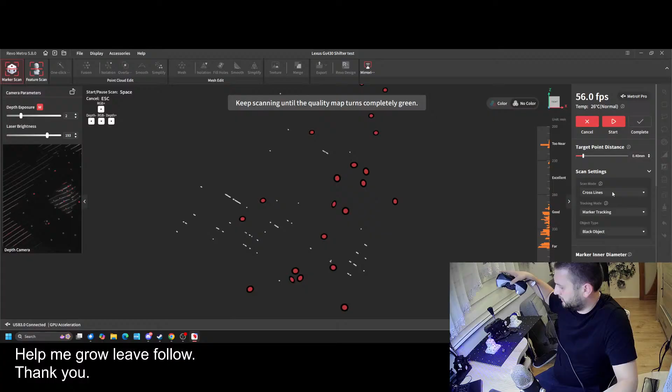So cross lines, don't know if you can see it, let me turn off the light. There's loads of crosses on my hand now. So there's different modes. This cross line like this. If you change to that, then you just have normal lines, as you can see. You got the single line. Apparently this is meant to be quite good for, wow, UV. I'm wondering if I can get tanned. So it's single line.

General turntable. Turntable, I'll leave it for another video or another live. Full field. I don't really know what this is about. Come on, hurry up. My roller says you're rolling too long. Disco mode, disco mode. Oh, wow. Not sure what this is about, but I know for sure it picks up.

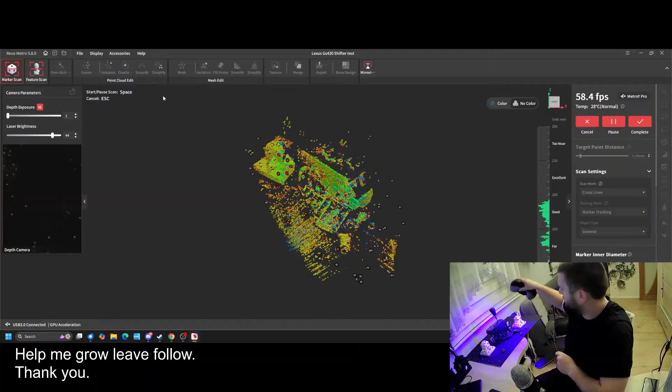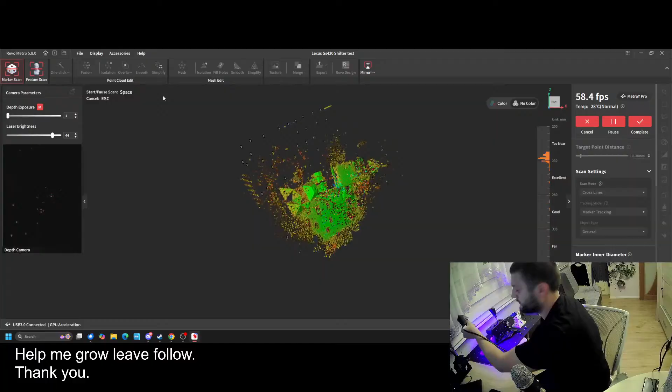So let's begin. I'm gonna press play. Okay, so I think I'm struggling with the amount of markers that I've got. I think I need possibly more. There's a weird thing where you... usually I've got the depth for 2. Okay, so let's stop. This is just a quick one, just to get the feel for it.

So if I change view, does this actually change anything? Oh, okay. So that's when we try to scan this with general view, right? So that's general, marker tracking, cross line. Okay, we're gonna do complete, and we're gonna add a new one. And now if we select object to black, we're gonna repeat the same scan.

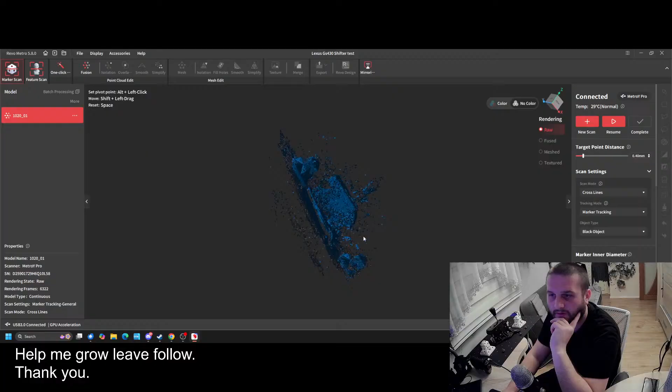So okay, new session, and we're gonna do object black. So now the laser is actually quite a bit brighter as well, so that's quite interesting. So now let's play. This picks up the actual thing very quick.

Not me farting, it's my chair, just to give you a heads up.

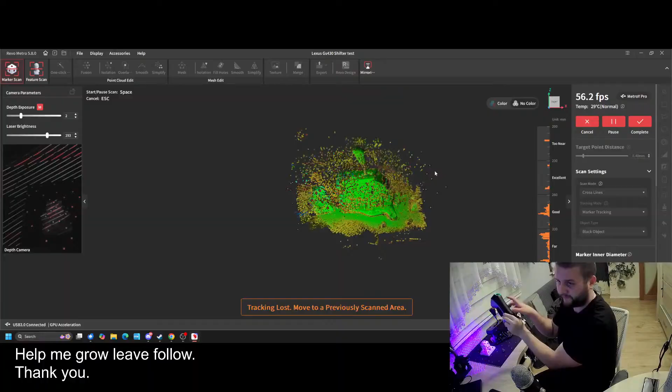So you need quite a lot of dots. I can see that I'm struggling with the scanner picking up dots. It picks up quite a lot of noise as well. It's actually quite interesting because now I cannot really see what I'm scanning.

Okay, so also another thing. Once you put your scanner down, the laser disappears. Once you take it away, hey, failing on me. But when you're about to place the scanner down, the actual lasers stop. So that's actually quite cool. So let's do complete.

So this is our scan. So what we're gonna do, fusion. So let's fuse this. Oh, why do they say 0.38? I don't really understand the whole point, that was on 22. Okay, I'll leave this on 22 because that's what I had when I opened the software. Fast. Apply. And let's wait. Let's see how quickly it's gonna do it.

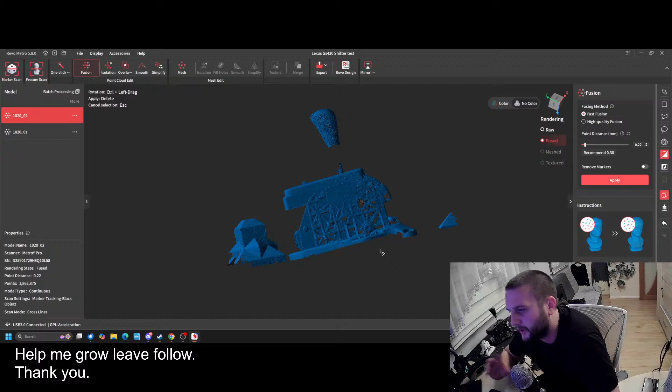Let's try to clean this up. I played with this a little bit before, so I kind of get an idea how to clean this up quickly. You do something like this. And then you clean this up. I don't think we really care about the bottom as much, because once you place your part on the side to tackle it from all the different angles, you would capture the bottom end anyway. Then you select this bit, I don't want this rubbish. Delete. Circular. Delete.

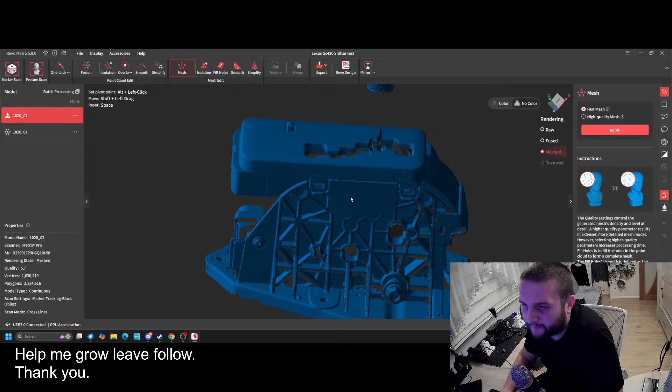Okay. Applied, we already did this. So we're gonna do mesh, and then apply fast mesh. So that's only one angle that we scanned. That actually did quite a good job. After mesh, you can kind of see the numbers on the gear shifter as well. And that's me without even trying. Oh wow, you can see the actual nut. It didn't pick up a lot of stuff, so that's not a problem. Let's get back to scanning.

Feature scanning. Keep scanning, quality map turns completely green. Okay, we're gonna do scanning with markers. I believe you can improve the quality of scanning with markers. Shift it on this front. Move my markers closer. I don't know what happened here, but press play. The only problem is I don't really know what I'm scanning now, because that little toy decided to zoom in.

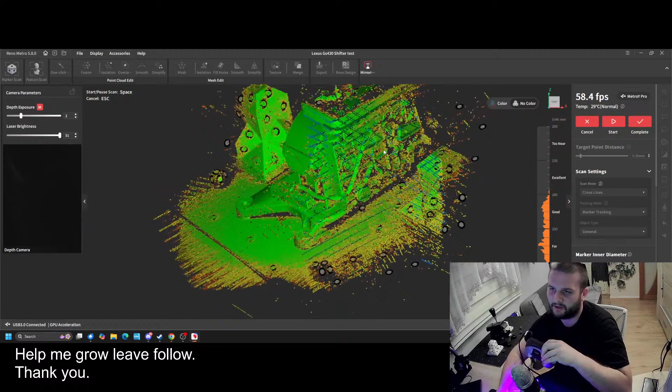Oh, we lost it. If I pause the scan, can I zoom out? Yeah, I can. As a blind man, I've done good, you know? Get back to scanning. Scan this side a little bit. The only thing I don't really understand is why it's now back to general object instead of black, and general settings don't really pick up nicely.

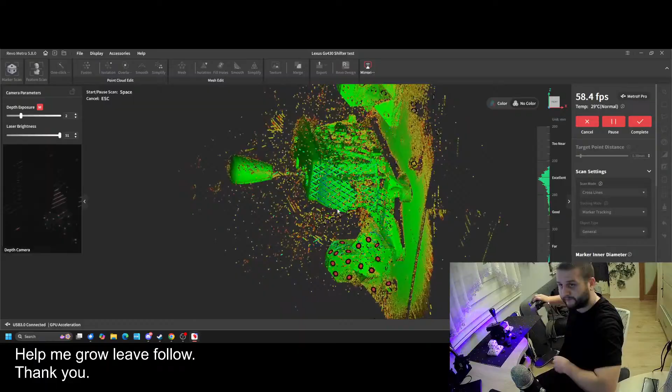So I've got a little bit of shiny. Stick my finger there. So it actually tries to pick up some of the shiny stuff. Scan away. Complete. Currently, with the one-click fusion, there's a little bit of an issue from what I've seen, but that's a different story. I see, so when you use general, it's using 0.22, and then when you're using the black stuff, maybe. Anyway, apply. Let's see how that's gonna work.

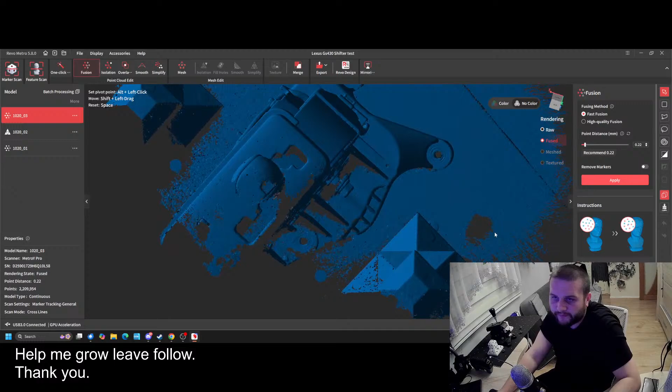Also, for anyone looking into 3D scanning, this is kind of a demo to show you how difficult it can be, or how easy it can be as well. Yeah, you've done okay. Also, I don't have as much experience with this software because I've been using a different scanner before, which is good, but everything has its downsides. For sure it doesn't give you as much detail as this scanner does. It doesn't work with black objects really well, but it makes scanning very quick.

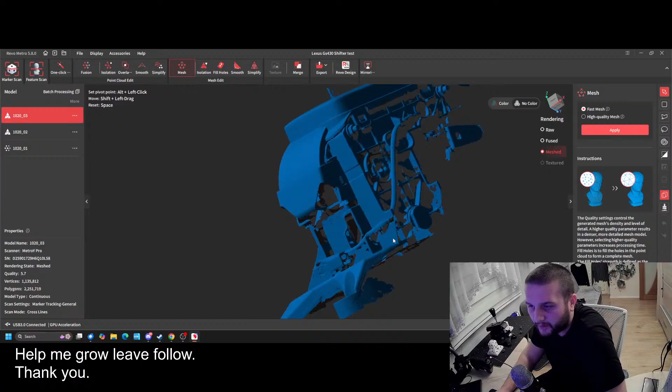Okay, so if we do the mesh now, fast mesh. Oh wow, it actually picked up this hole. It picked up the connector as well, the cable that runs. Okay, we're gonna go back and scan this using not general but the black object mode. So we're gonna repeat this scan.

It's a very weird feeling when you walk with your hand. So with black object mode, this scanner doesn't pick up this object very well, but the object is black, so it's expected.

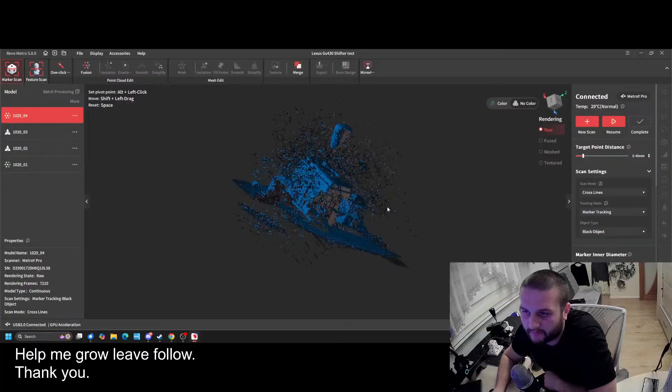But in the majority of cases, you don't really need this. Okay, we're gonna pause this. Put the scanner to the side. We're gonna complete. It's very noisy. Very noisy. Okay, we're gonna do fusion. Fast. Oh yeah.

You can tell if you got a Pro model by the golden ring. But to be honest with you, I don't really remember what the differences are between the Pro and the normal model. You got the buttons at the back. I'm using mine while it's plugged into a PC. I'm gonna have to try the actual remote function, but not today. I think the best performance should be obtained when you're actually hooked up to a cable.

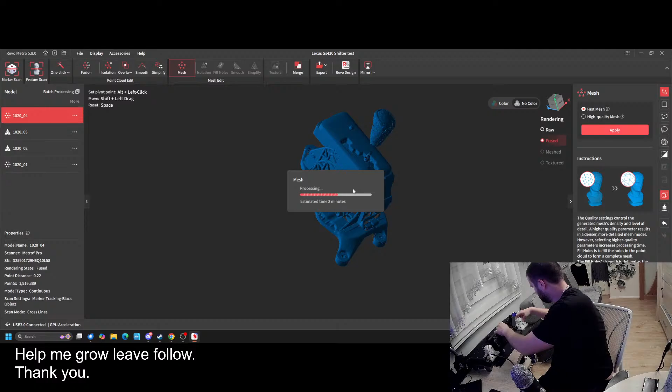And let's scan the bottom of this part, to make sure we can see my little towers. Oh, by the way, just to give you an example of how the towers look. If you want, send me a message and I may release this, make this available as a tower. But pretty much whatever angle you place this, you should be able to get at least 3 dots to be recognized. It's actually not bad, right? As a quick scan, oh, I didn't scan the back, but you could possibly scan this to get your fixing points.

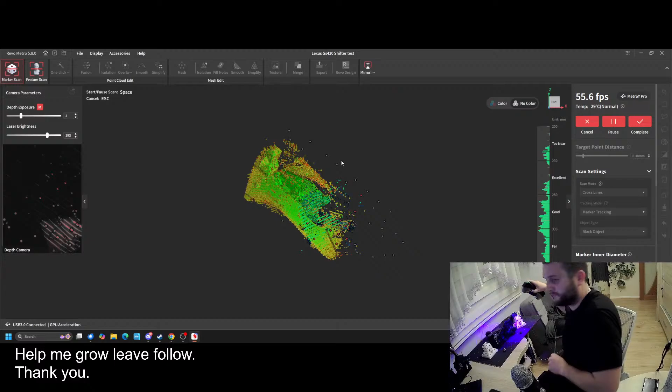Okay, so now let's go back and scan the bottom. So scan. No markers. Okay, I'm gonna do it with a little bit of an angle so you can see the floor or the bottom plane. That's what I meant. You can delete the bottom bit because now we gain the actual dimensions of the feet. Let me try to actually capture the knob.

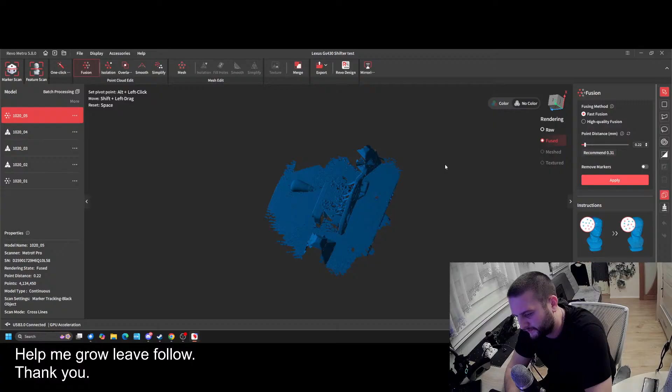Okay, so this one is actually processing a little bit longer, but that shouldn't really be a problem. Okay, so that's done. So let's clean this up a little bit. I'm gonna do a magic. I'm gonna remove this bit here, delete, and as this is connected, I'm gonna select this bit. It's thinking. And that did the trick. Yep. Looks good.

So now I'm gonna go to mesh, apply fast mesh, and it's working. Points: 1 million. Damn. It's actually not that bad. So if I try to merge this now, I'm gonna do this one and this one, and I'm gonna do align, fingers crossed. Gonna break this, I swear down.

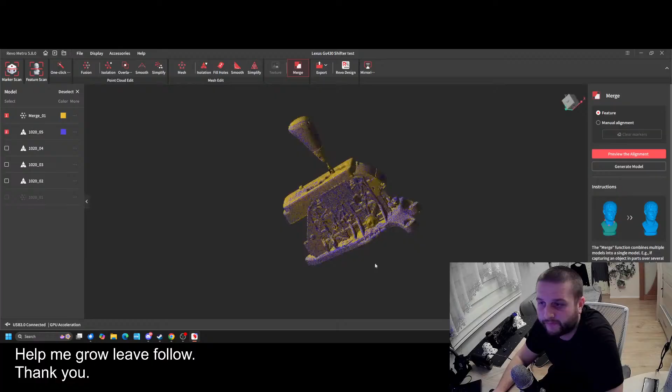So that's overlaid. This one is overlaid. So what do I need to scan? I need to scan the back. This scan didn't have the back. Do we clean this scan? Okay, let's try to overlay all of them again. This is processing. And what I'm gonna do, I'm gonna flip the actual product, the shifter, upside down. So we're gonna tackle the scan from this end.

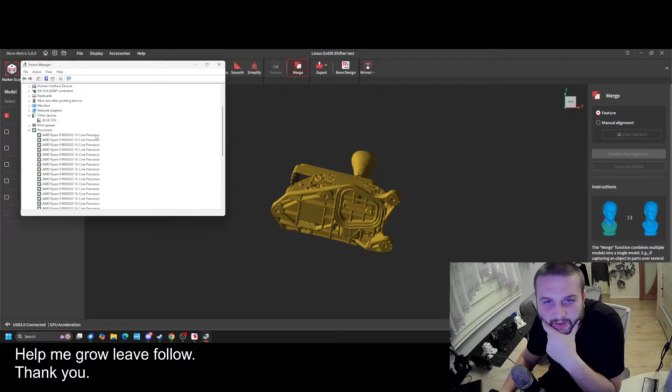I think some people with lower-end PCs or laptops might struggle a little bit with it. It might take a little bit longer than what you see here. The reason why is the spec of the PC that I've picked up for this work: the processor is AMD, and the graphics, where's the display settings, is NVIDIA. And then you've got a normal SSD and 64 gig of RAM, DDR5. So to be honest with you, I'm quite pleased with the way this came out.

Okay, so let's add to the scans. There's a black object. So I lost my markers. So my towers work quite well. So it sounds like I need to make myself a few more of these. It sounds like that's quite a good option for bench scanning. Too close, not a problem.

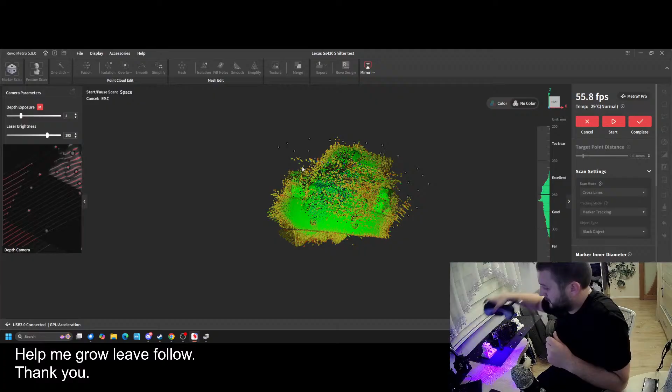Okay, pause. Then set complete. So I need to make a few more of those mark points, or the markers. So I do fusion. Let's run this.

So like, the shifter here as an aspect, it's not that big, but sounds like within possibly 3 hours or 4 hours of scanning, you could actually get a very good detailed scan of the shifter, which is quite impressive in a way, because with three hours scanning the amount of engineering time you save is quite amazing.

Because to say, for example, this is a bit unusual. Like, try to get the placement of these holes and this hole, and get the shape of this bit here and other stuff. It will take a little while to measure this with a vernier. With a scanner, it's like what, 3 hours, and you've got a very good detailed model to work with.

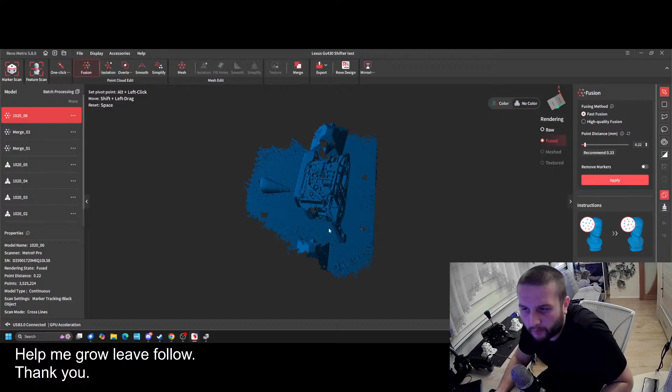Okay, so now, currently I'm facing a problem. Say for example, if you don't clean this model now with this version of the software, this is what I've been playing with yesterday, and then you just go and mesh it, it will do the job. However, if you then try to delete anything from here, you struggle. It will just not work. But the people that made this device will possibly be fixing this, because I gave them a heads up, like, hey, what the heck is this?

So just delete that. Yep. Delete. Delete. Actually, saying this, the lasso I think might be better for this. Okay. Then you go to mesh, apply. So maybe when I'm doing it live, it's actually better for getting an idea of how the scanner works, because you get the real feedback. Okay. So that's done.

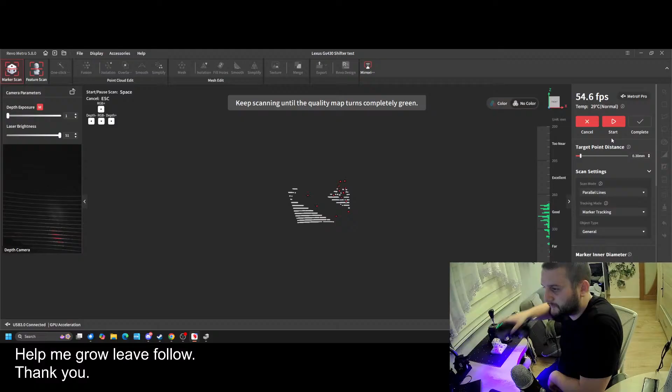Let's scan the back of the shifter. Place those towers very close so the scanner can pick it up. I don't care about the top, so I can have markers placed on the top now. Where's my marker? And let's get some detailed scans. We're gonna try parallel lines. Why not? Something different, right? Yes, we should be able to mix and match between the scans. Okay, so now, the only downside, we have to select the object to be black. Now it's selected to black, and then let's scan.

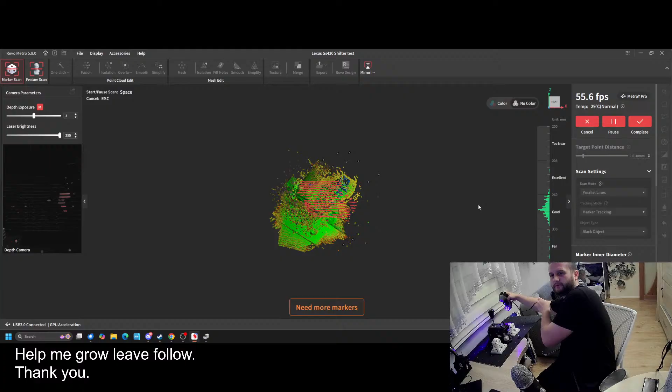Uh-huh. Yeah. So this mode seems to be a little bit slower when it comes to scanning, but I believe this might be more detailed than the other one. And we want to go under. So with my tower setup, you wouldn't be able to. Wait, let's get the markers. Bits as well. Okay, lost it. To give you an idea, but I'm gonna remove. Oh, I don't wanna. Okay, so quick scan complete.

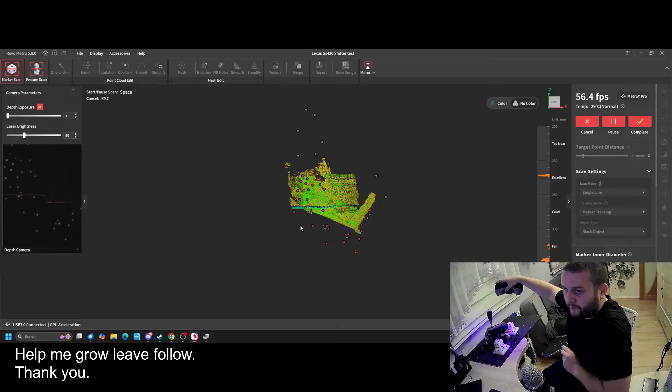Okay. Wow, this is actually quite impressive. What we're gonna do now is try this single mode. Single line. Black. So now we've got a single line. Let me try to scan the top as well. Zoom in.

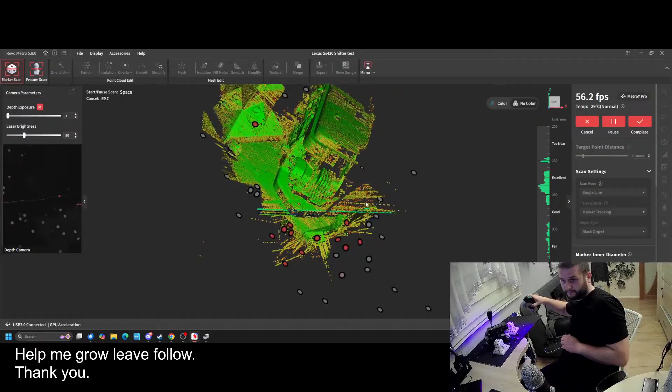Taking now. So there's like a cavity hole in here. I'm not sure if I picked this up with the other. Let me scan the top. I want to see if the, what's it called? If the writing.

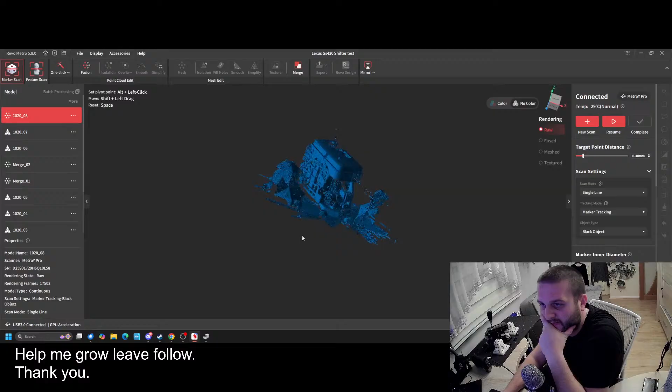Okay, stop. Mark this as complete. Let's do fusion. Apply. What the heck happened here? Okay, I'm not gonna crush this yet. Let's remove. Delete. Delete. Delete. Anything else? Looks okay. Mesh. Apply.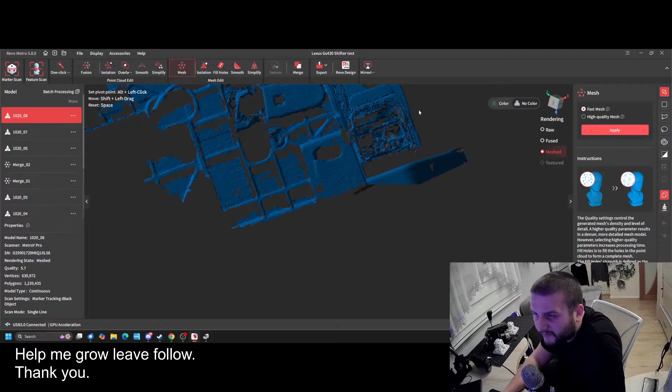Yeah. Okay, that turned out good because it can kind of measure the distance and so on between the actual faces. The little radiator stuff.

Why do you need a radiator? Lexus for you. Over engineered it.

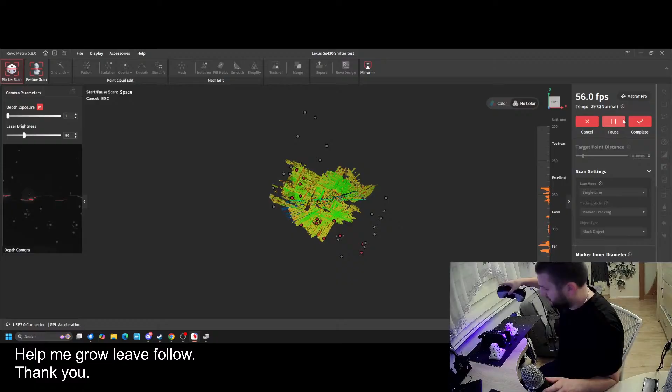Let's scan all this once again, but place this on the sides. So the markers and all the other stuff is way better. Single line, yes. Play. Is it problematic? So I really want to scan this. Can I zoom in? What the heck is this? It doesn't really see shiny bits, but okay, let's try to see if it actually picked it up.

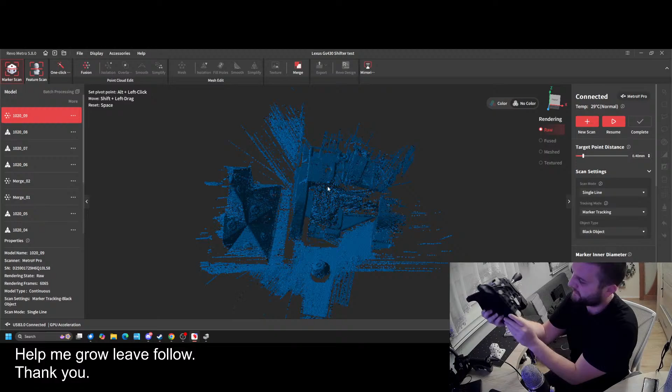So that was single mode. So I'm trying to get this connector. Trying to scan this connector as a white background. So let me do fusion, apply. Let me clean this stuff quickly. I don't need this. That's done. Let's mesh. Apply mesh.

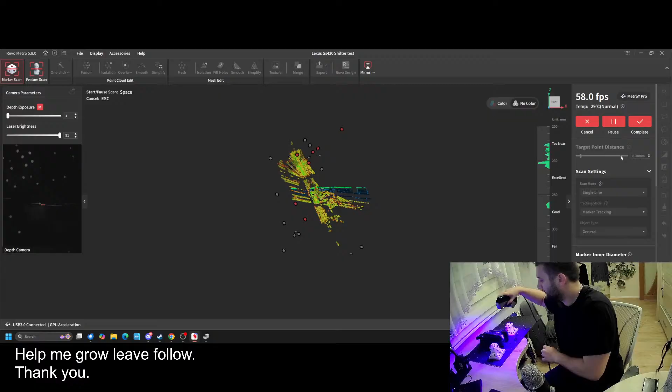Bro, what the heck? Okay, delete this. Or leave it. Let's try a different mode. Or is it because I marked it as black? Okay, let's go. Now I want to find out for myself. Let's zoom in. I don't understand if you've got this set to black. Brightness of the laser is actually quite bright, so it makes sense for it to be diffused at the white color. Okay, that looks a little bit more sensible.

Oh man, I need to hit the gym. My hands are weak.

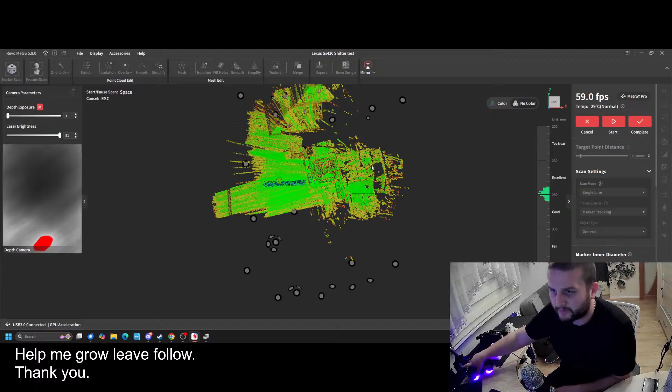Okay, let's stop. Okay, let's complete this. Fusion. I'm tempted to change this to the recommended settings. Remove markers. I don't care about markers because I don't have any markers on there. On part. Okay, apply. Just keep it consistent. Give me mesh. Apply. It's a little bit more sensible.

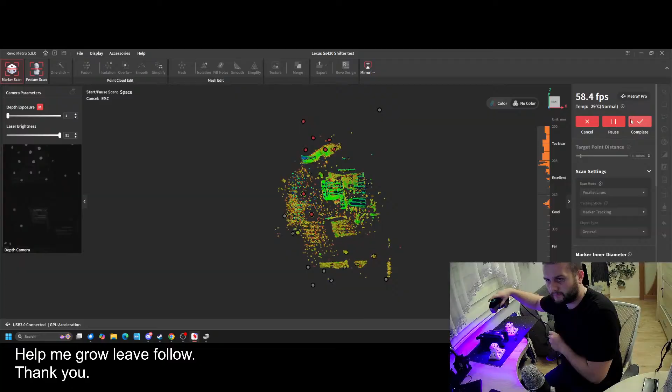But they were saying the single laser aspect is meant to be for doing the actual holes, not... I'll try this mode. So let's start scanning. So I've got general object, not as black. So let's see how that's gonna work. Why are you complaining? So now it picks up all the white bits a little bit better. Yeah. Why is this? And then

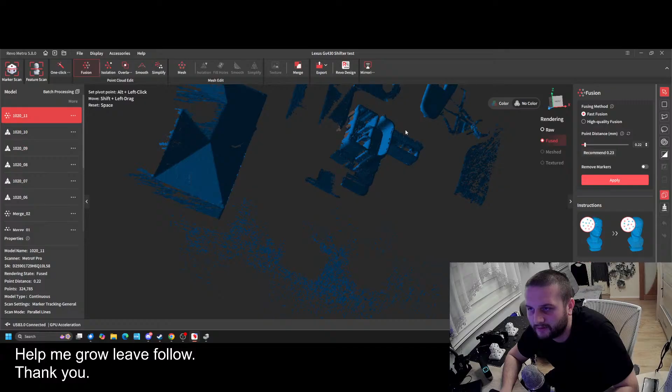Okay, just a quick one. Complete. The good thing is the actual sensor, what's it called? Okay, now what? Sorry for the language. Fusion. Yeah. That looks better. That looks wonderful. That looks very good.

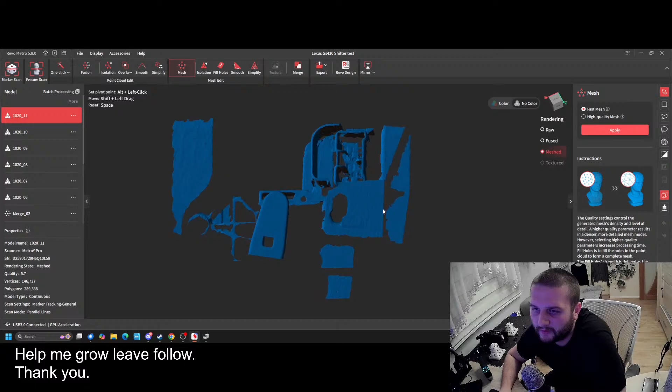So what I'm gonna do is remove all this noise here, all this stuff here. Then I will mesh this. Okay, that looks a little bit like a flat surface. So it sounds like this has been picked up from the part. I may remove this stuff here and this stuff here. Then I'll mesh this. Okay, okay. That's not that bad. You can easily work with this. I worked with worse before.

You don't see the pins, but that's okay. We can get the general shape of it and so on, so that's fine. The majority of work is sort of done. If you can extract the shapes, it's easier. The pins you can work out. Okay, so I'm gonna do merge, and I'm gonna add this, this, this. Yeah. Let's align.

I'll go for a little toilet break.

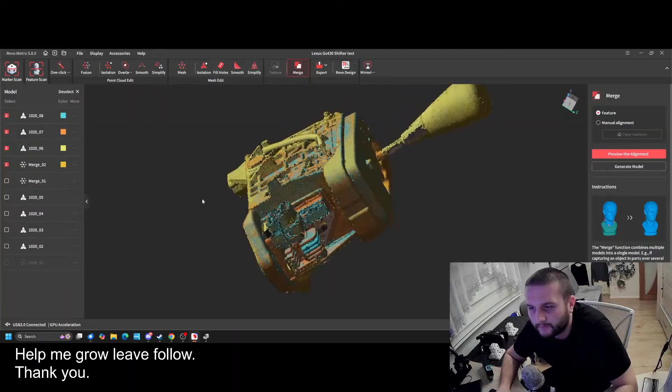You could possibly make this align, but I don't have time for this. Even 08. Okay, so that's good. Am I missing anything from the front? Oh, I can delete this. No, no, maybe not. Okay, I'll leave this one. Looks a little bit messy, but okay, so I need to flip the shifter the other way around.

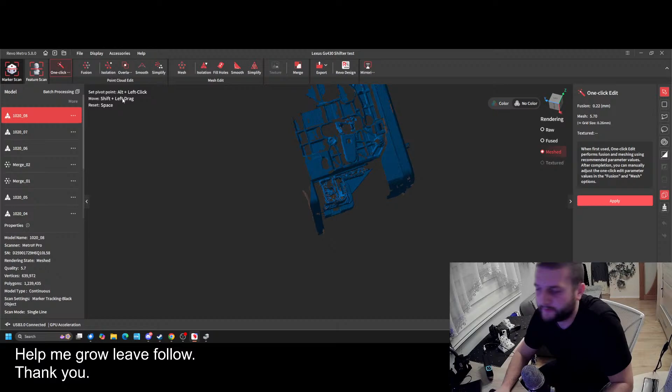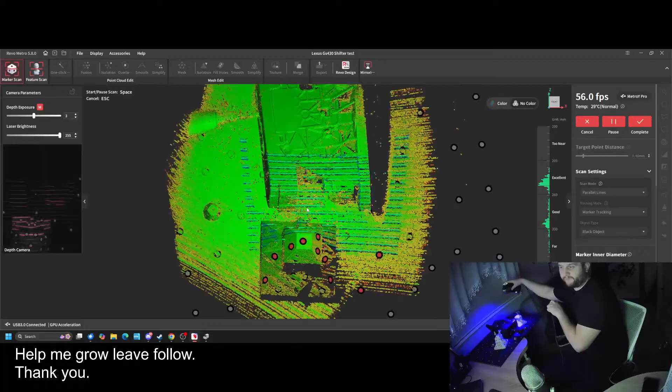Scan. Okay, I can do this. Black. New. Black. That's cool. Okay. Let me maybe try to turn the light off as well. Gosh. Wait.

So now, okay, the part is a little bit too big, but I needed this bit here. So this is interesting because this part here is actually very reflective. It's like chrome, and this scanner actually picked this up really well. Impressive, impressive.

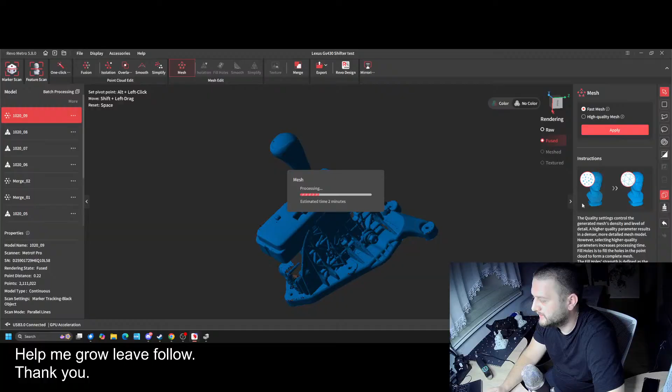Let's do mesh. And that's not even trying to use a high quality mesh. That's just quick. To be honest with you, I'm quite impressed with this scanner.

Well, this live is an hour and 40 minutes, and this is me messing with stuff. I think if you know how to tackle your object, you can get stuff scanned very quickly. Look at this. Even from this one single scan, you can extract the major fixing points for your object. At least in this case, this Lexus shifter.

So I'm going to try to do merge, and I'll add this. What's the other one? Oh, that's already merged. Align. Very impressed. Very impressed. And also the software works quite quickly, at least for me. Check this out. Are there holes there? Yeah, the holes are there.

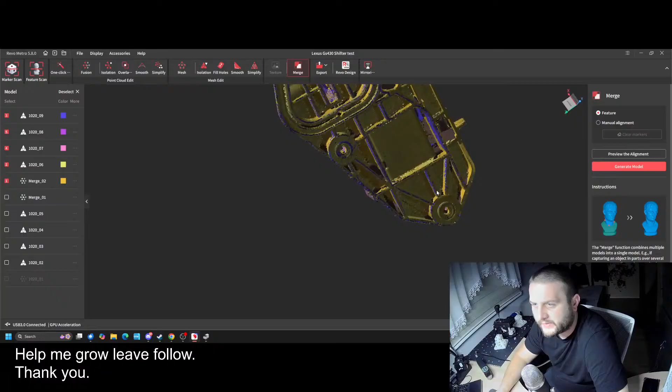Am I missing anything from underneath? Yep, there's a hole there. There's a hole there. This bit underneath will be very difficult to scan because there's no access. Or should I try to scan this way? Okay, I'll try to scan this way.

No, I'm very impressed. Money well spent, at least for the time being. Marker tracking, black objects, yes. And if I switched off the light.

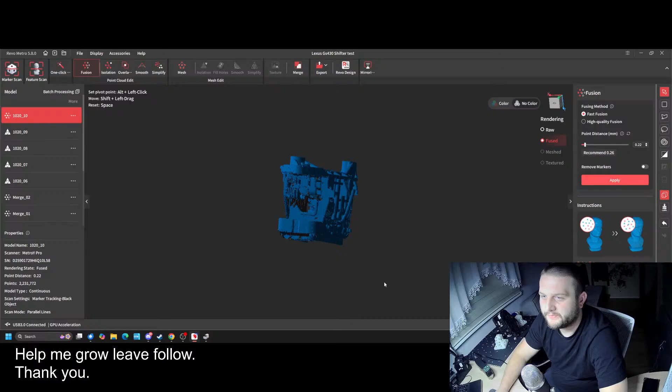Okay. So that's fine. So let's mesh this now. And after this mesh, we're going to put the actual scan together and extract this.

Wow. Wow. This is very good. Very good. Align. The aligning process in this software is quite easy. What I'd want to learn as well is how to... I think the scanner can overlay the actual colors. I just don't want to mess with it now because I've done so much to get to this stage.

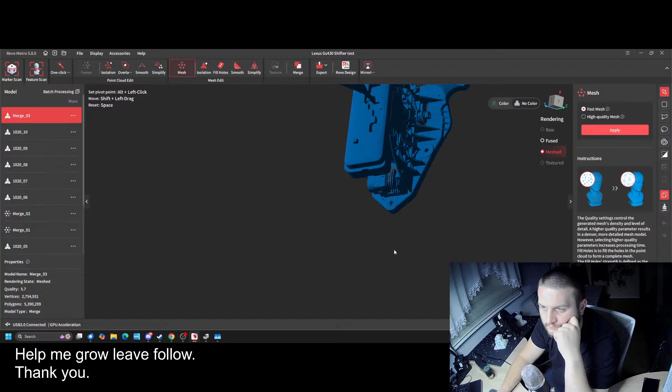No, you can definitely work with this. For reverse engineering or anything like that, you can definitely do it. You can definitely work with this. Yeah, you can. Okay, so if we want to export this, fill holes, let's fill holes, curved, detect. It's going to be loads of holes.

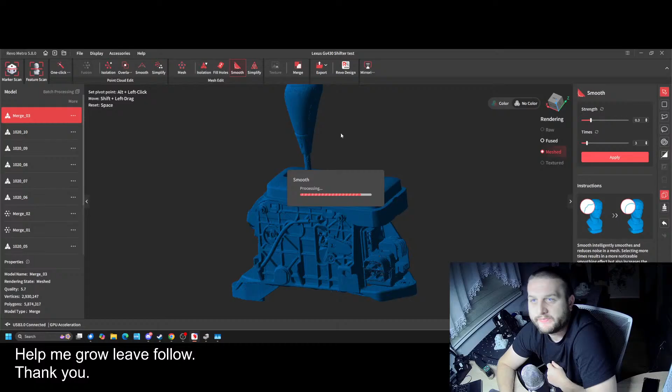Okay, this looks good actually. I can try to smooth this to see if that helps. Just standard simplify. Okay, simplify, apply 40%.

So that, I believe, is going to reduce the amount of triangles, so it'll be easier for other PCs to actually handle this scan. Almost 6 million polygons. Quality 5.7. Don't even know what that means.

The memory hungry. So now if I go export, and then I'm gonna go to work, 3D scan, and I just dump it here.

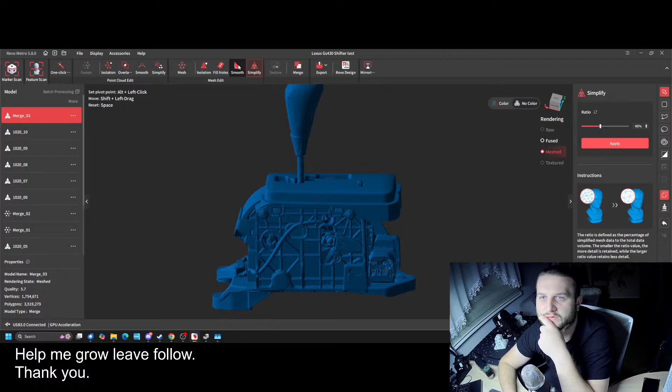Wow, you can actually see triangles quite a bit. Okay, let's do this. Let's smooth. Apply. Export.

So now this is as a raw file. Not compressed. So is it even worth compressing this if it's not 300? Okay, double. Not compressed. Yes.

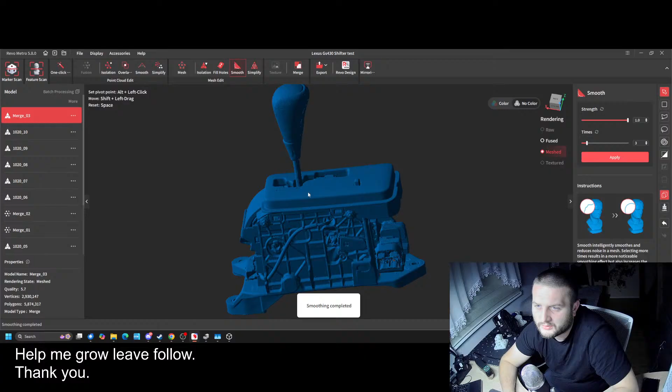If I do smooth, strength, apply. Okay, so one is too much. But maybe the default, let's stay with the default.

So personally, I think where I messed up with not getting as clean a scan is because I've used different modes in the scan. I've combined loads of different scans when I used different modes to scan. But overall, this is actually pretty clean, pretty good, at least in my opinion. And then I'm gonna do simplify.

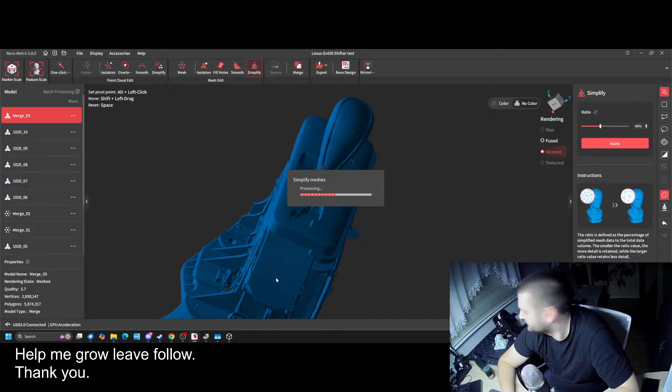To be honest with you, I'm impressed. I'm very impressed with this scanner. It's actually quite good. Yeah, look at this washer. Okay, so that one is compressed, open. Yes, I'm impressed with this. I'm really impressed.

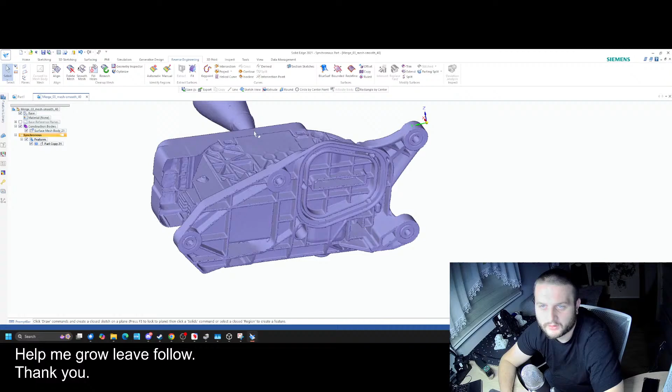No, I can work with this. This is quite a good scan. Can get these shapes out, this stuff out. You can get the actual size of the holes. Okay, that'll be it for today. I'm quite pleased with the scan.

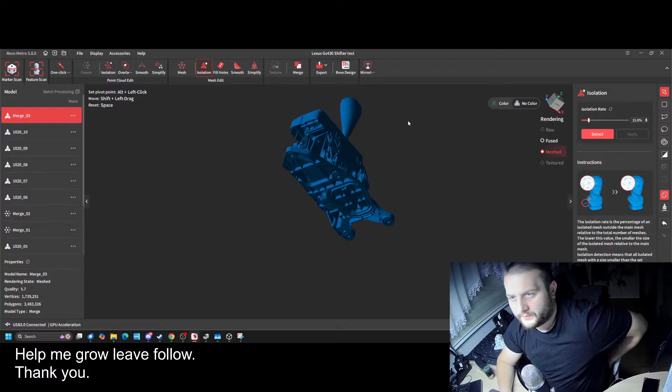Then extract. I don't want to save this. Extract mesh, STL, smooth, yes, overwrite, yes. And I should remove all the little flying bits. So I think this scan was a success, to be honest with you.

I'm gonna try to simplify this even more, to like 70%, apply. I just want to see how bad it makes the actual data output. Because if it's simplified more, people with less powerful PCs will be able to actually use this.

Because I know for sure with my older laptop, when I put this into the CAD software, I wouldn't be able to easily rotate all the aspects of the scan. So if I save this as 70, okay, it's not that bad, but you can see the quality loss. But I guess you still can work out all the major features. Oh wow, it even picked up this middle bit.